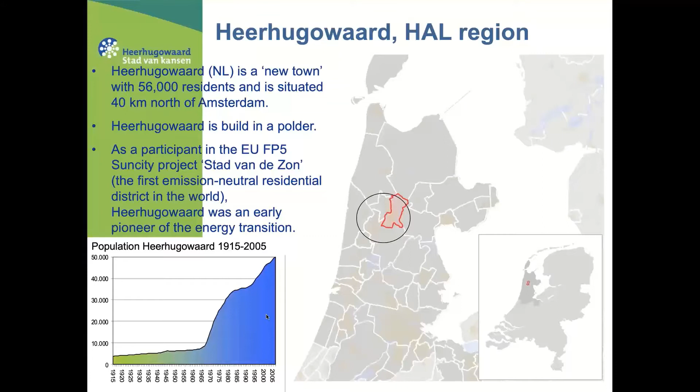Worth mentioning is that the city has always been pretty innovative in the way they build, so connecting to EU programs, and one of the results of that was the Sustainable Neighborhood of City of the Sun, which is pretty prominent in the aerial photograph nowadays. As you will see, it's this rectangle over there.

Originally a polder, and a polder in Holland means that it's a meadowland made of peat, and peat is very soft. You can't do a lot with it. You sink away. So you're surrounded with dikes, and you keep draining the water level until you get dry feet. And if you get dry feet, you can build on it. That's why you have to keep draining. And originally, this polder was peat, and then it became a lake after it drowned, and then it was drained again in 1650 something.

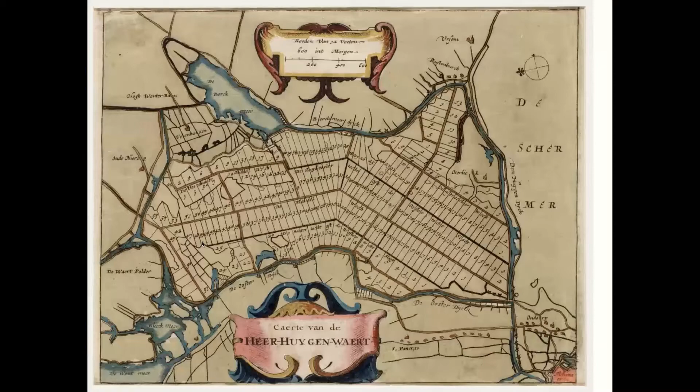And this is interesting because the engineers of that time, they used this grid-like fashion. So a lot of polder cities have a grid-like network, which is pretty uncommon in old medieval towns where everything's like radial and meandering. And especially this center line running straight through the polder, which is conveniently called the middle road, the Middenweg, was the base from where they more or less excavated and made new land. So all of the parcels were perpendicular to that line. And we still see that line.

If you put the north in the north, you get this prominently in the build-out of the town, growing along the Middenweg, getting side street to side street next to it, ultimately getting too big for accessibility. So you get a tangential road on the western and on the east side, called the West-tangent and the Oost-tangent, the East tangential and the West tangential road. Not that creative, but it works. And then you got three parallel routes: east, center, and west, picking up the car traffic.

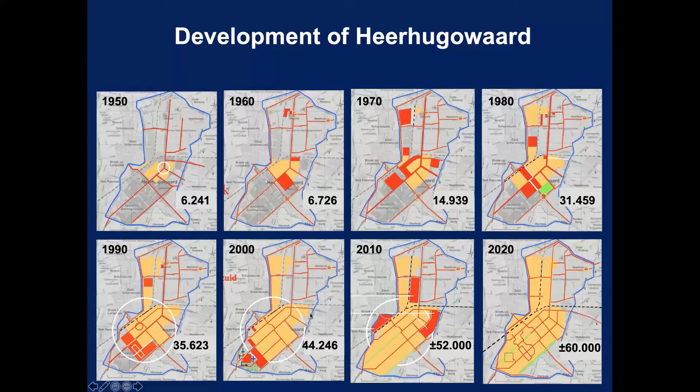And ultimately that became too dangerous, so the center lane, the Middenweg, was cut off for through traffic, only accessible for local traffic, for buses, a lot of buses, and a lot of bikes, connecting to the city of Alkmaar, to the train stations, and then to the rest of the Netherlands. So this inner corridor became really, really important. The rest of the bike network, as you can see, still is relatively dense. I'll skip this one.

But these are the main corridors for commuting or faster or more direct cycling. The conditions Taya mentioned in the beginning: safety, directness, coherence. That's what you all see over here. Well, comfort and attractiveness are part of that network as well.

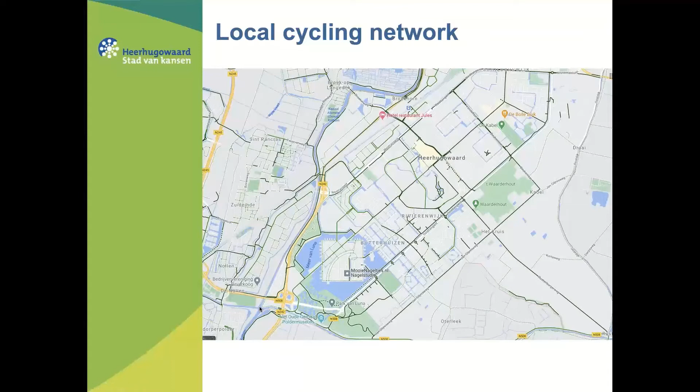And comfort and attractiveness on this middle road, which is super central, which is super important for the town, were kind of mediocre at that time. At the same time, it's still super important, because if you look at the regional network, you see that this line coming from Heerhugowaard connects all the way through the city of Alkmaar to the south to other towns.

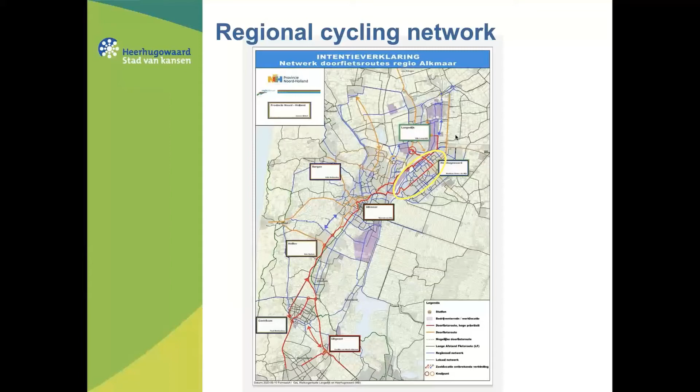So in this regional bike network for longer distances, commuting and recreational use, all of the conditions for that local link should be met. So ultimately, I'm going to focus in design on that link. I'm not going to explain the whole design, because previously we made a pretty neat video for that, and I'm going to show you that instead.

But still, with 8 buses per hour, that means more than 100 buses per day who pass each other on a 5.5 meter road, which is actually more like 5 because of the encroachment of the green. Everything was just too narrow, and separation was impossible. So something had to be done. And that's where I was brought in 5 years ago, together with Heerhugowaard and a lot of stakeholders.

We experimented with the idea of a bicycle street, which was previously used within neighborhoods or within towns and centers to prioritize bikes on a streetscape. But this was a stretched 3 kilometers long route from the center to a neighboring town, which went from suburban to kind of rural in its feeling before it connected to Alkmaar again, meaning that a bicycle street within its normal conditions would be stretched. And it doubled as well with the condition of a major bus route.

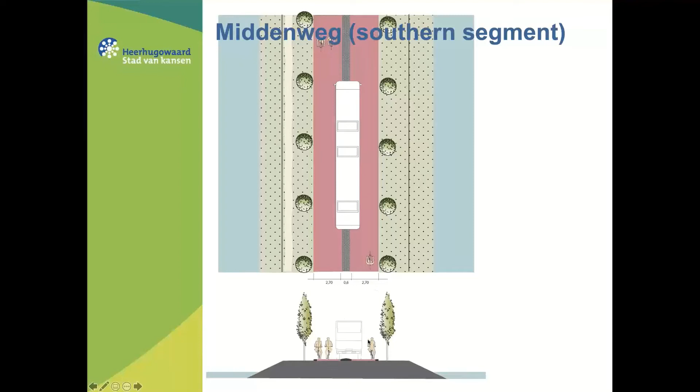Here you see the road called the Middenweg, located in the town Heerhugowaard, the Netherlands. For centuries, the Middenweg has cut straight through the surrounding rural polder landscape. However, the southern section of the road was in need of restoration. Before Mobycon's intervention, the road surface was bad. There were traffic safety conflicts, and even the trees beside the road were deteriorating due to their age. Something had to be done, and the choice fell on a rigorous redesign of the road, including the lowering and widening of the road and its shoulders.

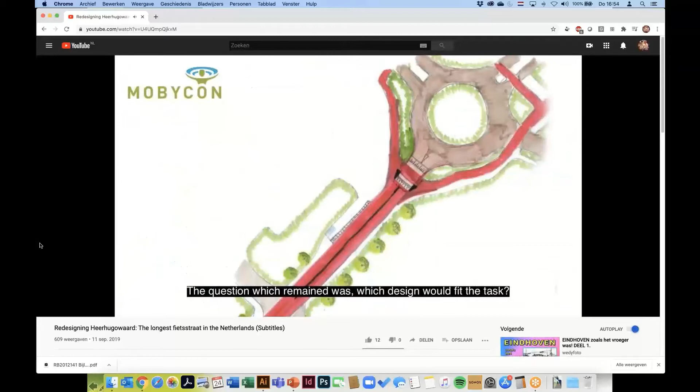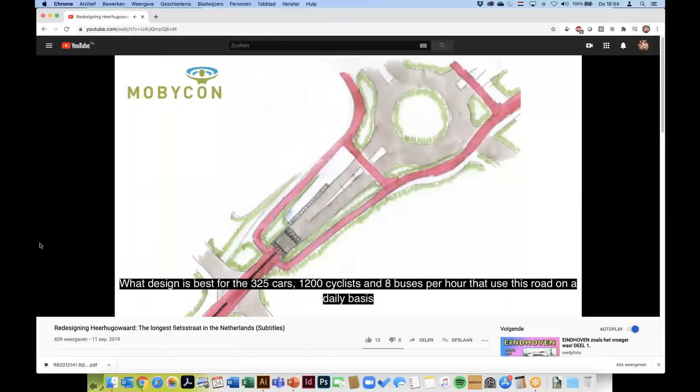The question which remained was, which design would fit the task? What design is best for the 325 cars, 1,200 cyclists, and 8 buses per hour that use this road on a daily basis? How should the adjacent houses, green spaces, and water bodies be incorporated? And what design meets the important historical context of the road? Mobycon helped design a new road layout which incorporates all current demands.

Dick van Veen, senior designer at Mobycon, worked out the design and supervised the participation process. Together with residents and local entrepreneurs, he worked towards an innovative road design where cyclists, pedestrians, buses and cars all have their own allocated space on the road. Within this project, participation has resulted in a widely supported redesign.

The Middenweg is really important for cyclists as it is the most direct and central route towards the biggest city of Alkmaar. But it's also a main bus route. It's straight and direct and runs centrally through the area it's going through. And because neither a separated bike path nor rerouting the bus was an option, this proved to be the main design challenge.

We really wanted to improve the conditions for cyclists. They should be top priority. So instead of having a car route with minimalistic bike lanes, we went for a design with a super wide cycle path on which cars were only allowed in as guests.

These projects, innovative as they are, really can't be designed top-down. They have to have stakeholders' involvement. For that, we got a design group together who actively discussed desired traffic behavior and went on drafting several designs. The stakeholder group involved residents, primary schools, business owners, the bicycle union, and even the transit company.